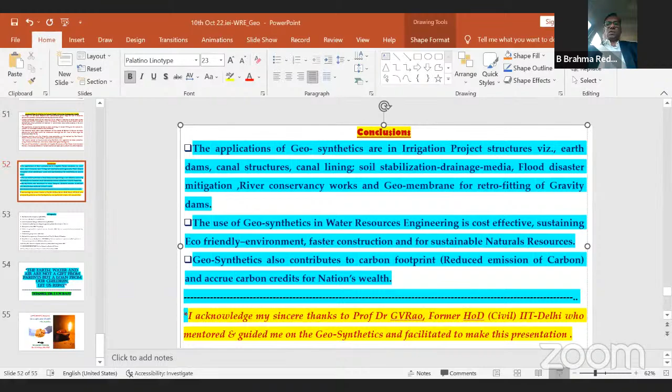Now, I request Engineer T. Venkatesham to kindly introduce the speaker. Over to Engineer T. Venkatesham Garu. Sir, Venkatesham sir is not available. I will introduce sir. Can you introduce, sir?

He was the recipient of the Best Irrigation Engineer Award in 2003 by the Government of erstwhile AP and IEI APSC, and many merit awards including Best State Level Nodal Officer of Government of AP Programs in 1996 while in service. He presented over 40 technical papers in Institution of Engineers India seminars, workshops, and other fora. He served as chairman of the AP and Telangana State Center at Hyderabad during 2014 to 16, and also National Council member of IEI during 2012 to 2016.

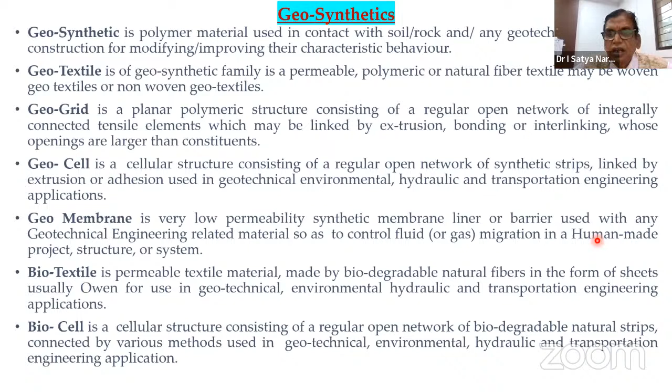Just like geotextile, there is biotextile, from the same family of geosynthetics. It is a permeable textile material made from biodegradable natural fibers. The best example is banana fiber. Banana stem fiber, with some treatment, can be drawn into sheets, and biocells also. Even coconut fiber comes under biotextile. These are some of the examples.

So now we are discussing sustainable development. Geosynthetics play a major role in sustainable development because they reduce or economize the use of existing natural resources for construction engineering, such as sand, soil, and metal. All these natural resources used in civil engineering construction are not renewable, and if we keep exhausting them, there will eventually be a shortage.

I think geosynthetics will replace some of these materials and make their use more sustainable. They improve the behavior of geological materials like soil or sand, and to some extent metal as well. Geosynthetics are developed and synthesized for specific functions or applications in construction, and there are different forms with different functions, which we will discuss in the next slide.

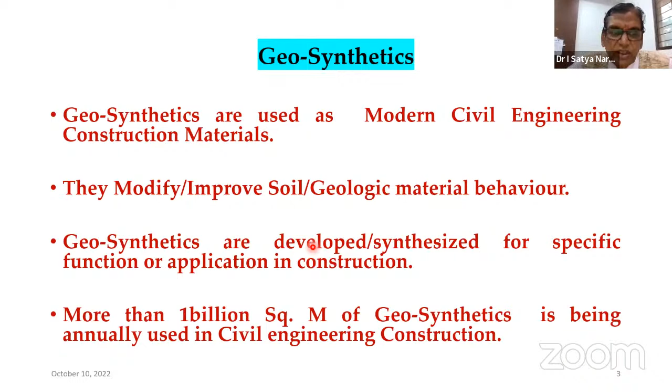As of now, I think India started using geosynthetics only recently, but globally geosynthetics have been used for the last five decades. Currently, more than 1 billion square meters of geosynthetics are used annually in civil engineering construction across the globe.

Regarding the composition and varieties, geosynthetics are composed of polypropylene, high density polyethylene film, polyester, PVC, synthetic rubber, and sometimes natural fibers like jute and coir are also used.

As I already discussed, different forms of geosynthetics include geotextiles, which are woven and non-woven, geogrids, which I will show you in figures, geomembranes, and geocomposites. A geocomposite means making a product using two or three different forms of geosynthetics combined. Geonets and geofibers are also included.

A good example of geofibers is fiber concrete, where we can use geofibers instead of iron fibers. Geomesh mattings are also there, and geopipes are used for transport of oils, liquids, and water.

Another important variety is geo bags. Geo bags can be used and are recyclable. Normally people use gunny bags and jute bags, especially for irrigation structures when there are breaches during natural disasters, but these are only effective one time and sometimes they deteriorate quickly.

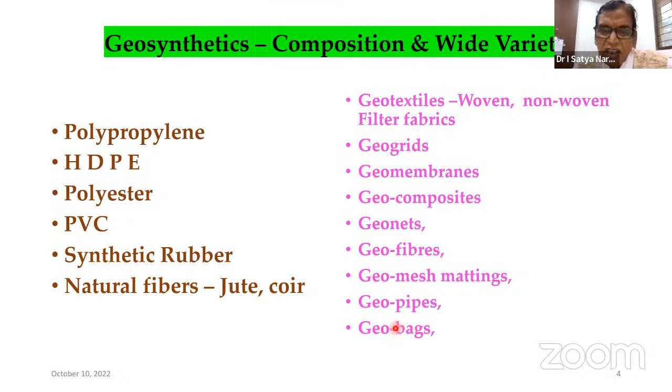Whereas geo bags can replace these jute bags, since they are recyclable. Once permanent restoration is done, these bags can be taken out and used elsewhere.

So this is woven and non-woven. Woven is, let me keep this simple and not too technical.

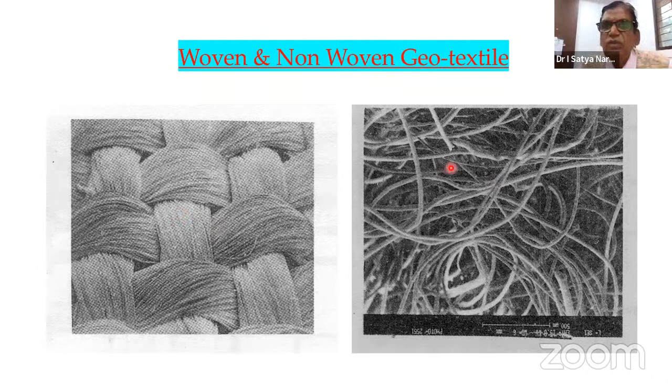This looks like that woven pattern. Whereas non-woven means there will be fibers of different lengths that can be directly used as well. That is woven and non-woven. Even textiles are woven in a similar way - that is the example here.

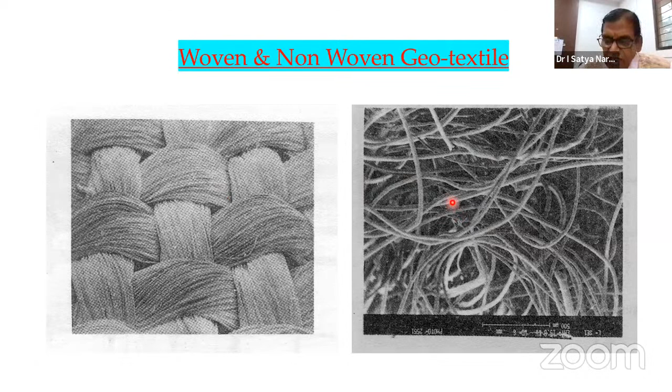In this connection, it is my privilege that Professor Dr. G. Venkata Apparao garu, former professor of IIT Delhi, helped the erstwhile state of AP and also the present states of AP and Telangana in the use of geotextiles. He was a consultant and guide, and because of his work a lot of economy in structures was achieved. He introduced and was very popular with the R&B department in road construction and bridge construction. I was introduced to him a decade back, and from then onwards I started promoting geotextiles in the irrigation department as well.

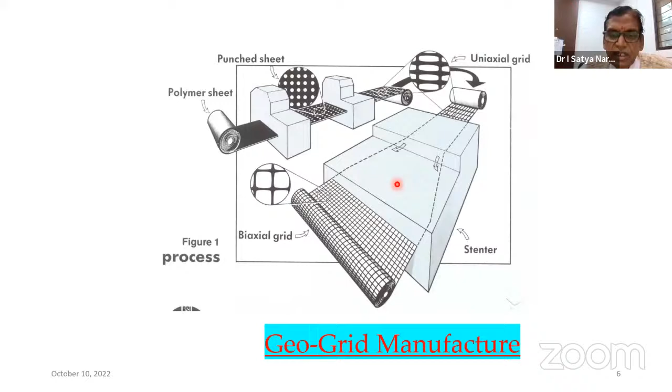So this is geogrids. As I mentioned, reinforcement can be in both directions, forming a grid like structure. Geogrids can be biaxial or uniaxial. Biaxial means it has fixed dimensions like a square, whereas uniaxial is one-sided, so it has effectiveness in only one direction.

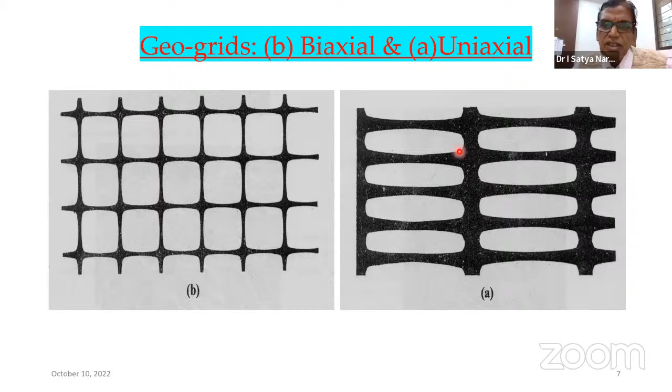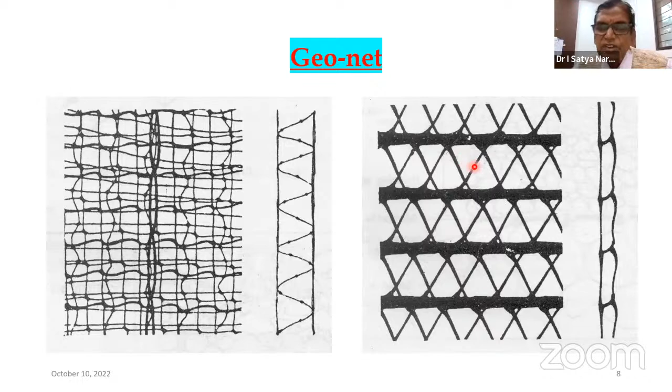We've seen fishermen's nets and other nets, even iron nets. One form of this is GeoNet. This will improve soil stabilization and foundation, and sometimes provide separation between two different materials.

These are geocomposites. Composite is nothing but a product using two to three varieties of geosynthetics. Many different products exist, and in important cases where required, we use geocomposites.

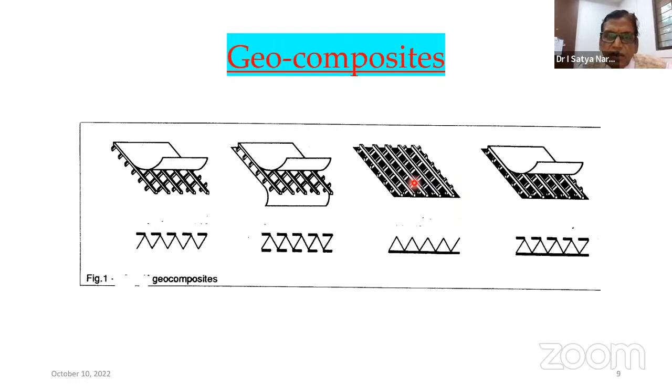Biosynthetics include coir, which is a reusable material. Presently we use it for car cushions and mattresses, but it can also be used in civil engineering as coir geotextile, though the coir must be treated against pests. This is environmentally friendly and reduces waste disposal.

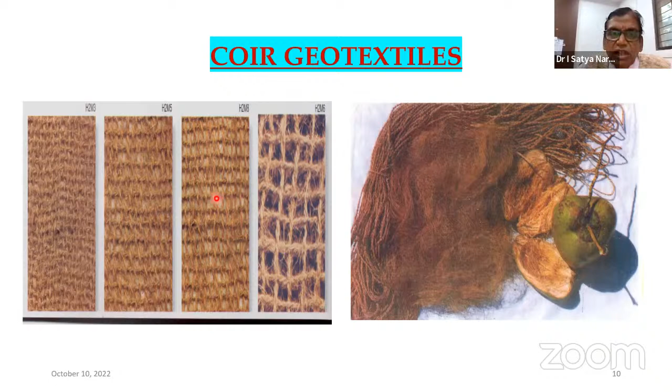Different functions of geosynthetics exist. One is separation. In roads and irrigation, we have homogeneous earth dams and composite earth dams of two different soil types—pervious and impervious. Whenever using two types of soils, we use this for separation between surfaces.

Another function is drainage media. When rain occurs, soil becomes saturated, and in saturated condition, soil loses strength. In that case, we use geosynthetics so that moisture in the soil can be drained through a proper outlet.

Filtration involves different soils. Our foundation or earth has different materials. We use this so that moisture drains off; otherwise strength won't be achieved and won't last long, and settlement will take place. So filtration media is important.

Reinforcement: just as we use steel reinforcement for a slab to give more strength, we can use geosynthetics as reinforcement to strengthen that component material.

Moisture barrier: sometimes different layers of material exist, and once saturated, moisture from one layer should not transfer to another—this is where we use it as a moisture barrier, and also as cushion. In engineering structures with black cotton soil, we replace soil with sand as a cushion to improve bearing capacity; instead, we can use geosynthetics for cushioning as well.

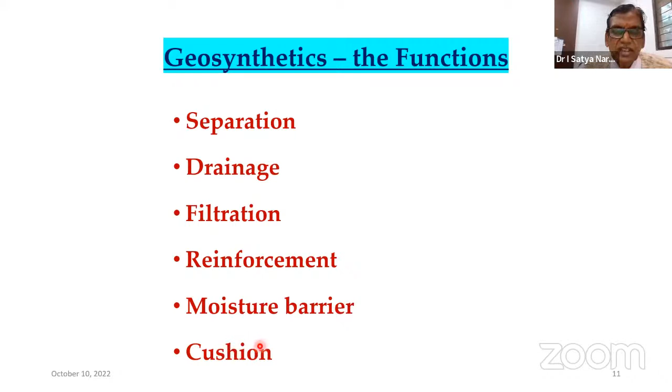This is the drainage function. By putting this geotextile, it will drain off—the pervious pores allow water to be drained out, connected to an outlet.

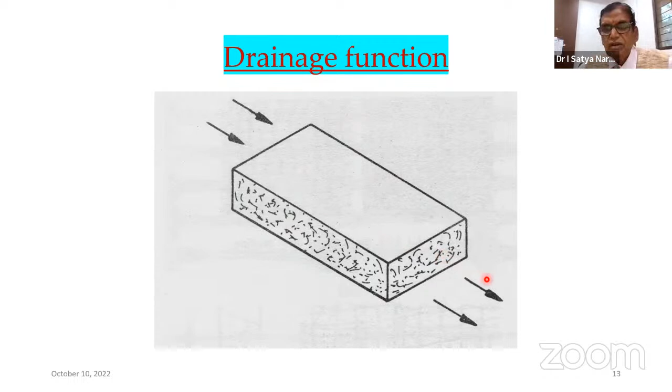Now the topic is limited to the irrigation department. Otherwise, geosynthetics have multifarious functions in roads and building departments, public health engineering, and sanitation also.

It's a filtration media. Natural soil has different types of voids, and ultimately underground drainage exists. Any moist soil, when rain comes, has surface drainage and underground drainage. When you put a geotextile here, only water passes through it. The engineering requirement is that the soil should not migrate—only water should pass without migration of the soil or material.

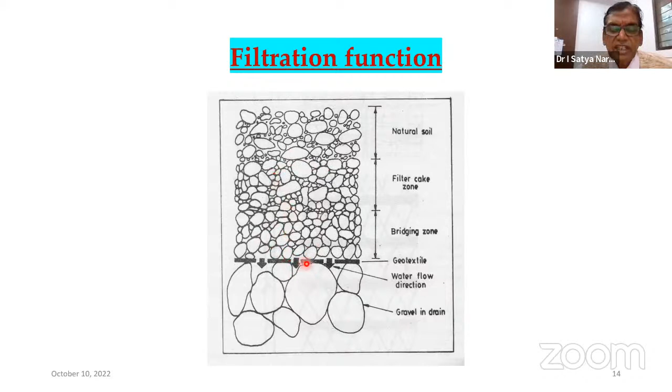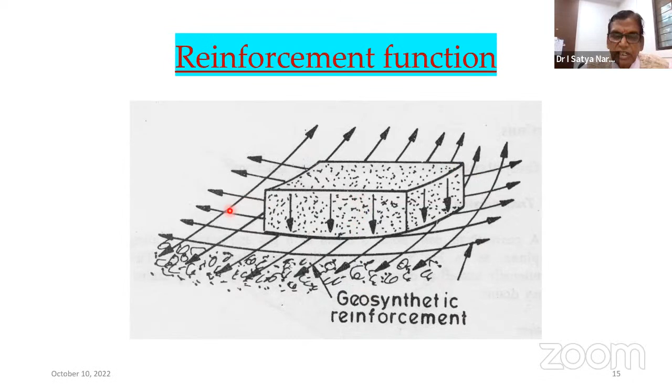So where are the applications for these? There's potable water and reserve water, and also to avoid wastage you can use the liners. Secondary containment of underground storage tanks - apart from overhead storage tanks, there will be underground storage tanks also.

Normally you are using concrete RCC walls. In place of that, you can also use geomembrane, so that the seepage losses will be reduced. Also solar ponds and agriculture industry.

Now agriculture - how will it help agriculture industry? Normally any wetting or irrigation will be done, but due to hot temperature, the moisture will slowly evaporate. So in agriculture, they lay the geomembrane to cover the topsoil, leaving just the required area for the plant.

Aquaculture industry - because aquaculture is nothing but fish ponds. So to retain the water in fish ponds also, you can use this. Golf courses, water holes and sand bunkers also - you can use it there. All types of decorative and architectural ponds also.

Water conveyance of canals - most of our irrigation department canals, if unlined, give a lot of seepage. So now we are using this to minimize that seepage. Even with a composite lined canal, below that we will place this material.

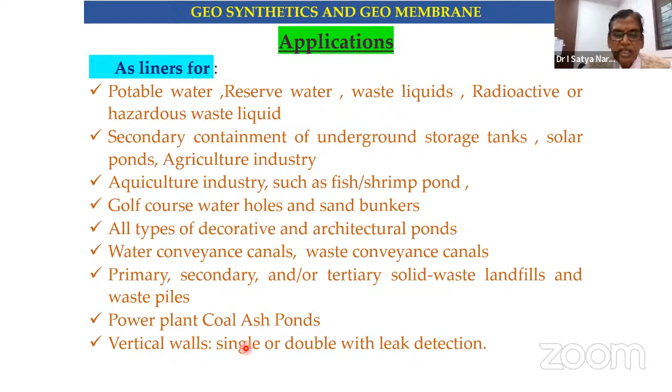In earth dams also we are using it, in cutoffs also for seepage control, and also emergency spillways. What is happening is after a passage of 30-40 years, the dam or spillway becomes vulnerable to leakage. In that case also, I will show you good examples of how retrofitting will be done using this.

Waterproofing liners - even tunnels also, you can use this as waterproofing liners. And seepage control of earth.

Coffer dams are temporary dams - you cannot invest a large quantum of money. They're temporary for 2-3 seasons to build the main dam, so there also seepage will be there. Instead of extending the dam to a greater size, by using this geotextile we can economize that also.

And barriers - I told you that landfills for solid waste management will have a foul smell. So this will act as a barrier to avoid the foul smell also, and vapors are also there.

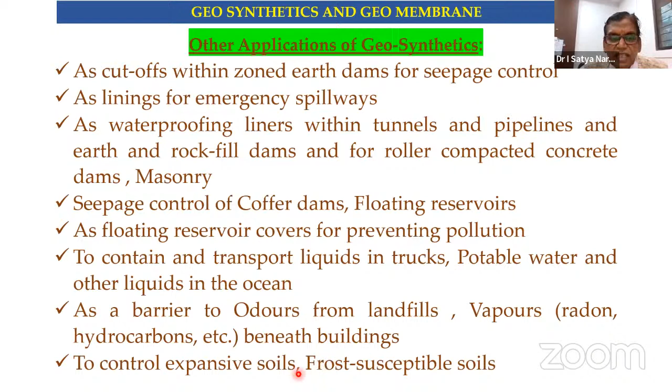And this is for expansive soils also. Some expansive soils make construction of structures very difficult because we cannot improve the strength, and the design becomes uneconomical. Then we can use this geotextile to improve the expansive soils also.

So liners for heap leach pads, like many other things mostly. Form barrier tubes as dams also - the best example is these plastic, synthetic dams. So rubber dams - we see rubber dams in Europe also. I will show you those rubber dams also, acting as rubber dams.

Instead of that, we can save a lot of soil and a lot of concrete also. For water flow pipes also, we can have geo pipes. And beneath highways, I told you that now it is a general application. In highways they are giving a lot of economy and replacement of the existing material, and the containment of structures of some temporary surcharges also. That means if the surcharge height is more, the retaining wall cost will be more, then we can contain this one also. Many applications are there.

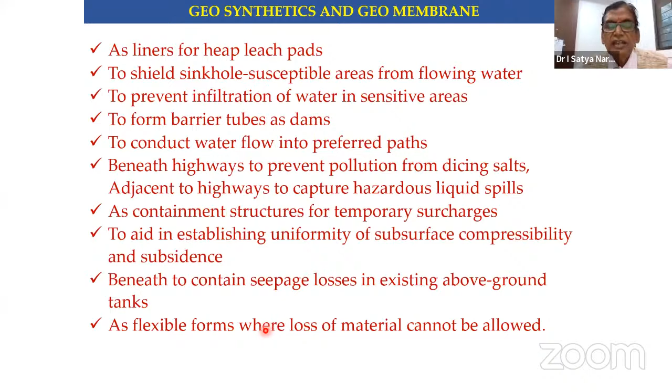In soil compressibility also it will improve. What is happening is poor soil is there. If you construct a structure, there will be permanent settlement and temporary settlement. So when you use this one, that compressibility can be reduced. Seepage losses below ground also. Like that, many applications are there. It is a flexible form where loss of material cannot be allowed, it can be recyclable, it can be used a number of times, and its life is also more. So this is one example.

Actually, river control, erosion control, and sea erosion control. I am telling you that it is a subject of the irrigation department only. So if you don't have any protection, whatever existing land will get eroded. Ultimately, the river encroachment will be there. So there, we can use this one. I will show you the different pictures also, how normally river erosion means slipping of that bund, and how it was done using this geotextile, and that land can be used for many purposes, industries, houses, or anything. But ultimately, river control and sea control will be an irrigation project, so the irrigation department will only take it up.

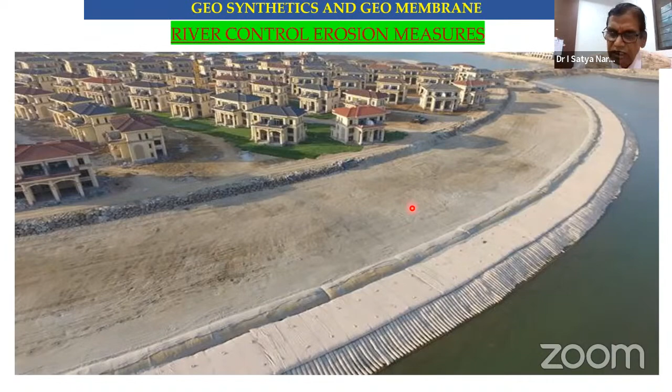So another important thing is river erosion. In Godavari, Krishna also, adjoining the rivers, there will be a lot of habitations. They erode the banks. Ultimately, it will encroach into habitation. So you can use these geotextiles. There is a common word we use, groynes. Normally rough stone groynes are used. But with rough stone groynes, in 1 year the stone will flow along with the material. So if we use these gabions, they will retain that material, and ultimately it will serve the purpose. It is a repelling groyne, so ultimately the river bank will be resettled here.

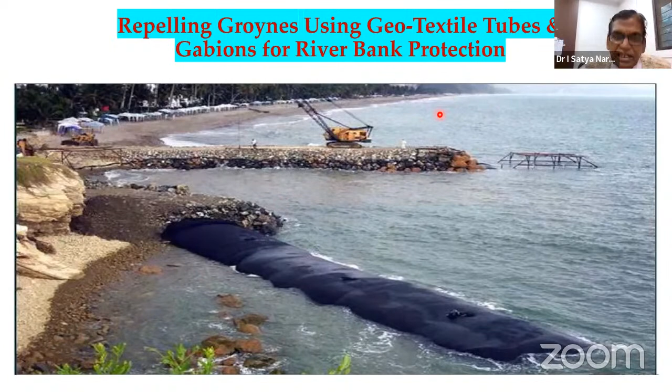Another example is geotube. Here we are using a gabion, whereas instead of this one, a geotube filled with sand can also be used as a groyne. So this is another form of this one. And the purpose of this thing is they are not permanent. After 4 years or 5 years, ultimately the river will deposit the sand, the material will get deposited, and ultimately it will arrest whatever erosion is there. So groynes normally use these rough stones.

Actually, I told you that sustainability of development is retained by economizing the natural soil. Stone and metal also are in the soil. It is not renewable. So we can minimize the use of this one by using geo bags. The inside heart is geo bags, and only the cover is stone, so that we can reduce the quantum. Sometimes in coastal areas, the quarries will be far away, about 100-200 kilometers. The cost will become very enormous. So at that time, we can use this one to economize the structure.

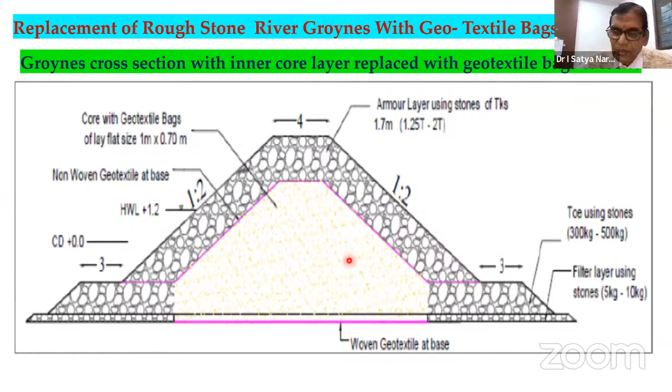This is part of irrigation structures where we can use these groynes not only for erosion, but also for minor irrigation sources, where they put a groyne across the river and divert the water through a canal system. Suppose we want to have some construction in the midst of water, you cannot. Soil will be eroded. Even sand won't retain. Even if stones are kept there, they won't retain that shape and size. So then we can use the gabion.

A gabion is nothing but a box. We can keep any size of stones in it, and they are tied with different gabions and ultimately cordon off this area. This is one form of coffer dam, I can tell you that. Suppose you want to have any construction, we'll form it like this one.

So the liner, actually, you see this membrane is there. That is leak proof. So by putting this one here, whatever quantum of water will be there can be retained for a long time. Otherwise, if this is not there, in 1 or 2 days itself, the seepage will be much more.

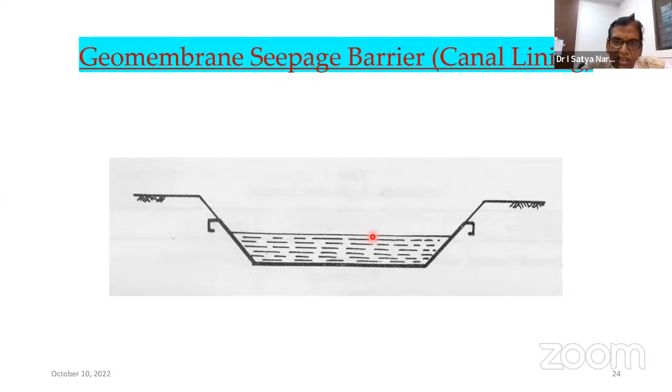So I told you that in canal lining also we are using this geomembrane. You can see this geomembrane fiber. So it will reduce the seepage losses and also transportation losses. This is one of the applications. In our Nagarjuna Sagar project also, the World Bank project, we have used this one. I will show you that figure also.

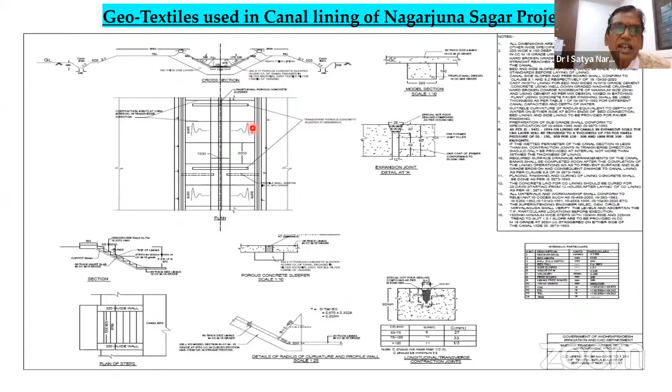This drawing was issued by our chief engineer. When I was the chief engineer, Central Design Organization, this drawing was issued. This is the lining here. Below that, we will use this one so that seepage can get reduced, the loss will get reduced, and it will be sustainable also. It is a composite application. Along with CC lining, we are using this one.

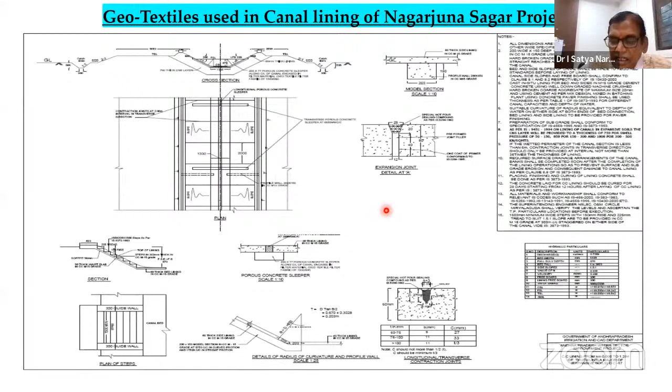But everywhere you cannot use RCC lining. So in that place, we will only have this geomembrane. And a lot of specifications were there. Some of our friends attending this know about this one. I told you that these geosynthetics have been in use for about 5 decades. In Europe and other countries, they are doing it. Actually, they are giving the technical knowledge to us.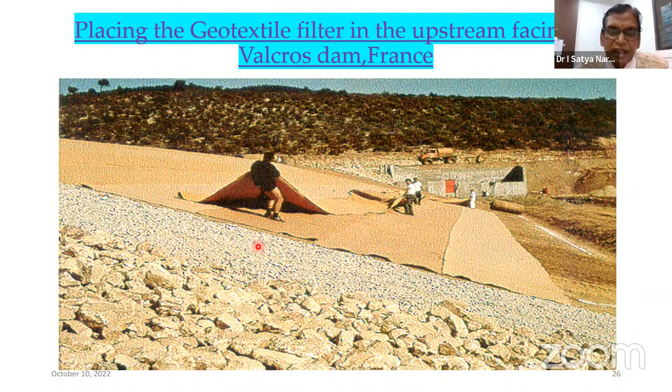Yesterday also in one of the WhatsApp groups, people said that the lining of Nagarjuna Sagar left canal is getting settled, because the drainage is not proper. So if you have effective drainage, we can use this one also. So this is the Valcros dam in France. So actually the dam is here.

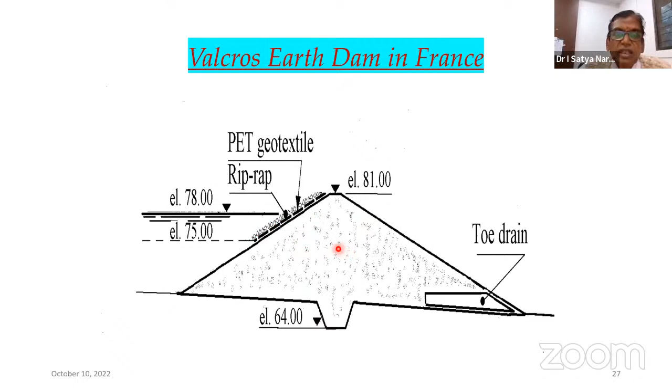So we are putting a geotextile membrane. Over that we are putting riprap, so that any water, whether it is river water or rainwater, there will be a mechanism of drainage without disturbing the body of this wall, without any erosions or dips or anything else.

So this is another concrete dam, Lago Nero Dam in Italy. After some time, these concrete dams will be prone to leakages. I think this dam might have an age of 50 years. So this dam was leaking. Then the project used this geomembrane, geotextile, pasted on the face of this one, and the seepage was stopped.

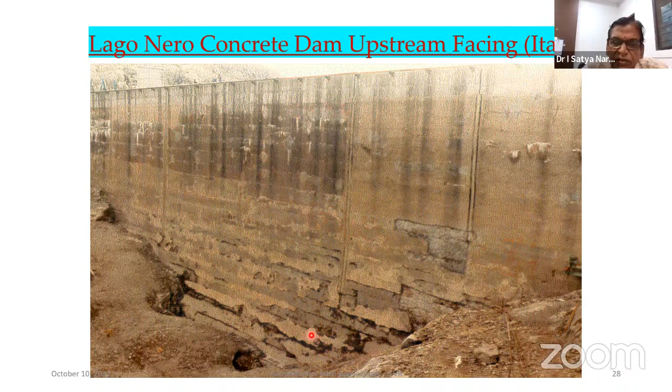And in India also we did one project. I will also exhibit that one. So this is a dam structure; on the front face, this PVC geomembrane and geotextile were placed. Of course, it's not that easy. We have to fix it with heating and all those things. Once this is done, automatically there will be no seepage.

Any dam is supposed to retain the reservoir capacity. If some seepage is there, it will not serve the purpose of irrigation or hydropower or anything else. So the retention of water storage is important. New dams will fulfill their requirement, but old dams will have seepage, due to wear and tear and other reasons.

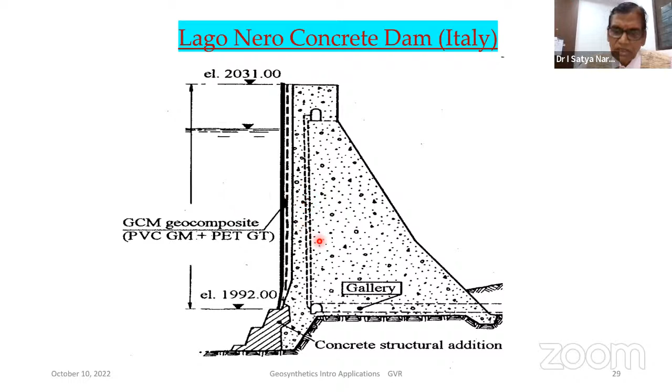So this is ultimately the dam you have seen. It was fixed with this geotextile or geomembrane, geosynthetics. You can see that it was pasted here. Beneath also, it will protrude into the keying. Ultimately, by doing this, the dam is retaining its own capacity. This is retrofitting.

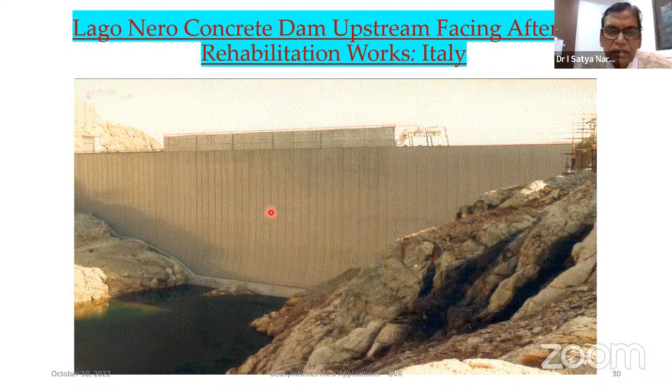So generally what engineers do when a dam is not serving its purpose is go for a new dam. A new dam's capital cost will be very high. So if you have this retrofitting, that will be economical, and the life of the dam will also be increased.

Kadamparai Dam is one dam in Tamil Nadu. It is actually a hydropower dam, a pumped storage dam with a capacity of 400 megawatts. Its storage is 26.85 million cubic meters. Actually, when I was CEDO, I also visited this dam to replicate the same in some of our dams.

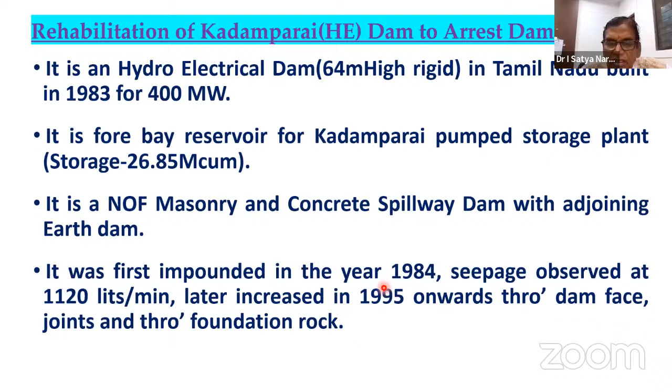It was completed in 1984, but seepage was observed at the first impounding itself, 1120 liters per minute in the surface area. Later it was increased in 1995. So ultimately the dam was not retaining any water. So then the retrofitting was taken up and it was done.

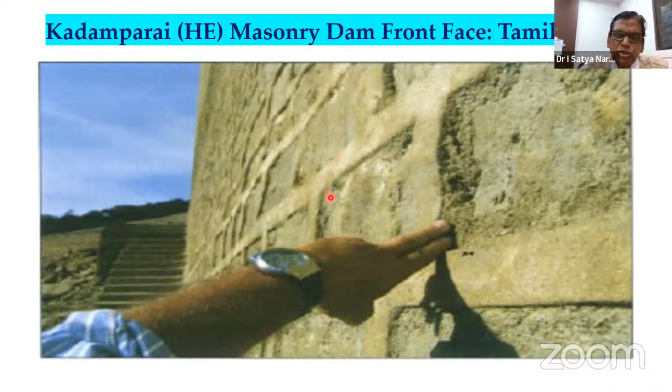So this is actually what you can see. This is a masonry dam. The joints will be there, and water is getting leaked through them. So ultimately, the dam is not serving its purpose. Though it was commissioned in '84, it was not repaired until 2005. So the capital investment in the dam has gone to waste. So ultimately, it was retrofitted using this one.

Its retrofitting was done by a waterproofing liner. I told you about one of the Italy dams where they fixed a PVC membrane. Similarly here also a 2.5 mm thick membrane was fixed by heating, with the non-woven variety, and it was also fixed by nailing. At such a height of 40-50 meters, if you simply use adhesive to fix it, it will peel off. Ultimately, it was fixed with steel rims and steel battens.

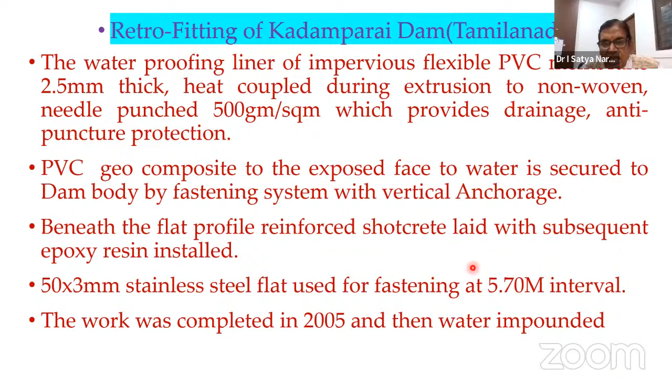This is the mechanism. A PVC geocomposite was used here and anchored to the dam surface. Flat steel profiles were also fixed at intervals of 5.70 meters, so that the fixing of the geomembrane will remain intact. Ultimately, the work was completed in 2005. So this is how it was fixed here in Tamil Nadu itself. In our country, this is the first of its kind.

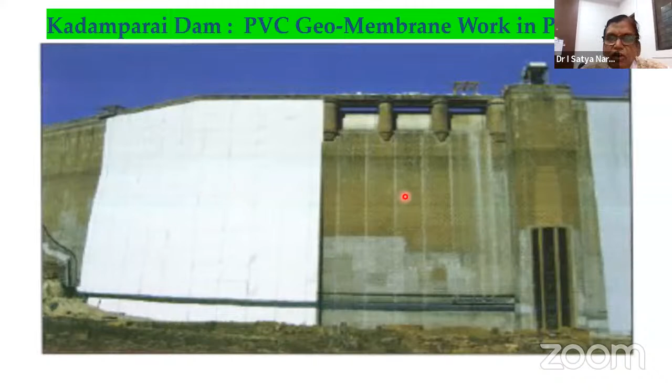I will tell you, this is a spillway regulator. This is a masonry dam on either side. The masonry dam is covered with concrete. Sometimes a masonry dam will have only pointing. So this is the dam. This is a portion of non-overflow dam. This overflow dam is nothing but our spillway regulator. You can see that this entire thing is fixed with geosynthetics in Tamil Nadu. Ultimately, it has become proof, with limited seepage only.

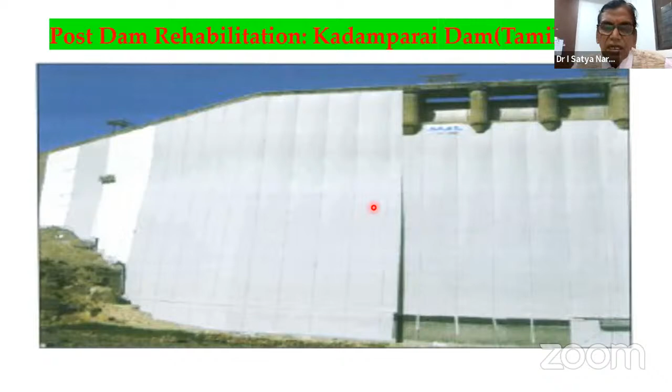I will discuss the cost aspects also. So the work was completed on this Kadamparai hydroelectric dam in Tamil Nadu. This is a hydropower dam. Initially after completion of retrofitting, they predicted 1400 liters per minute, against the pre-repair status of 28,000 liters per minute. Ultimately, when it was measured, it was only 63 liters.

That is much lower. The cost of this repair was 12.48 crores. The surface area is 12,700, which means it costs about 10,000 per square meter. They have given a warranty of 10 years also. So now the dam is functioning again, and since it is a hydropower dam, they recovered their investment within 5 years. The economic rate of return was in 5 years.

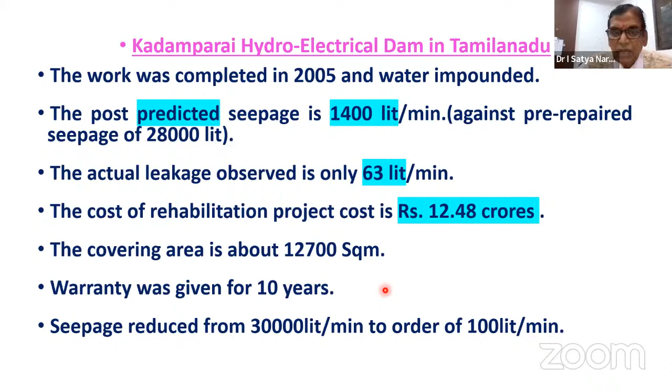So this is one way of retrofitting using geosynthetics. Now it is less than 100 liters per minute, which is permissible in any dam as per the IS code or Central Water Commission. Other applications are in earth and rockfill dams, which also use it for water tightness.

And I told you that we use the homogeneous section, and also composite sections will be there. In a composite section, different soils are used, that is, permeable and impermeable soils. We can use a geomembrane there, and it also provides a drainage medium without soil migration. Actually, we will use sand filters also. Beneath the sand filters, they put this geomembrane so that the drainage seepage is reliable.

Earth dams are not rigid dams, they are flexible dams. Some seepage is allowed, but some dams seep more quantity than what is designed. At that time, you can use this. It gives superior performance and is cost effective.

Sometimes old dams also need to be raised. For a concrete dam, you will simply raise it, but raising an earth dam is not that easy. For example, our Nizam Sagar. It was silted up with a lot of siltation, capacity was reduced, then they raised it. At that time, of course, they did not use geosynthetics, but you can use geosynthetics at lesser cost. I will show you some figures of how we can raise an existing dam, and also a new dam.

Sometimes the FRL and MWL also, because floods will come and more inflows will come, we have to modify the standards. For that modification of standards, we cannot replace it with a new dam at higher cost; we can modify at lesser cost using this. Also, for seepage control in earth dams, you can use geomembranes. Geosynthetics are further used to prevent soil migration. For the stability of an earth dam, we can allow seepage, but if soil flows along with water, ultimately it will turn into piping and the dam will breach. So it will arrest that soil migration. So I can show you.

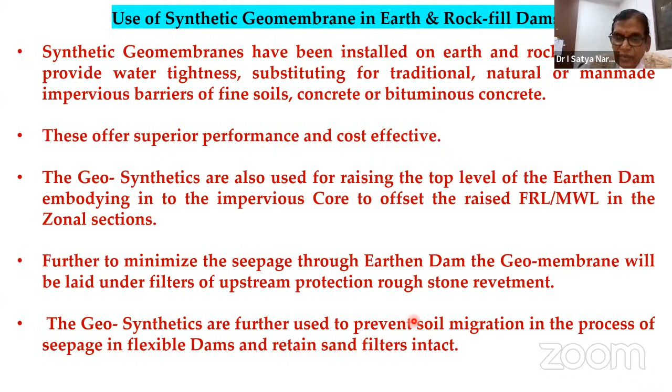In our earth dams, in irrigation dams, we will have a clay blanket in the reservoir itself of 10 times the height. That clay blanket doesn't last long. We can use this one; it will have 30-40 years capacity. It will reduce seepage. So we can have this face cover, and we can use geomembrane. For the face work, it is fixed with the toe wall, and also it is keyed into the heart of the dam.

Gabions, I told you, gabion technology is nothing but a replacement of our concrete wall or masonry wall. Normally for a masonry dam, we have to put cement mortar between the stones. There are also dry walls. If you put stones one over the other without any mortar, they will simply disintegrate and fall on their own. In that case, we use this gabion box, fill the boxes with stones, and different boxes can be tied to each other. What I showed you in the middle of the water, that gabion wall, is a replacement of a concrete wall.

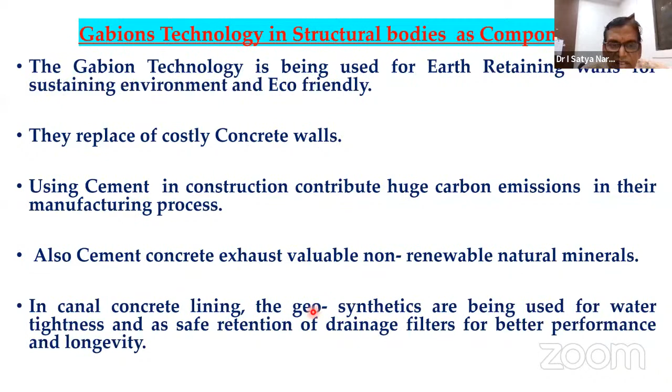In concrete lining also we are using geosynthetics, and in such different structures also we are using it. So you can see this one. This is also one sea erosion site. You can see some ships are also going there.

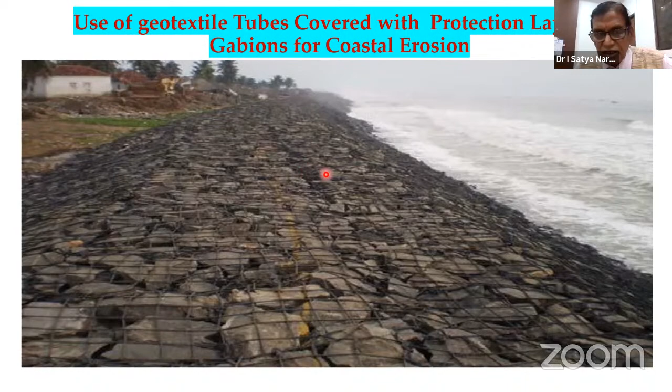So there we are using these gabions of different shapes. It may not be a box; it can be a net. Below that, stone is there, so even though sea waves are hitting it, that soil will not be eroded. So this is one gabion application, coastal protection. That coastal protection against sea erosion will mostly be done by the irrigation department.

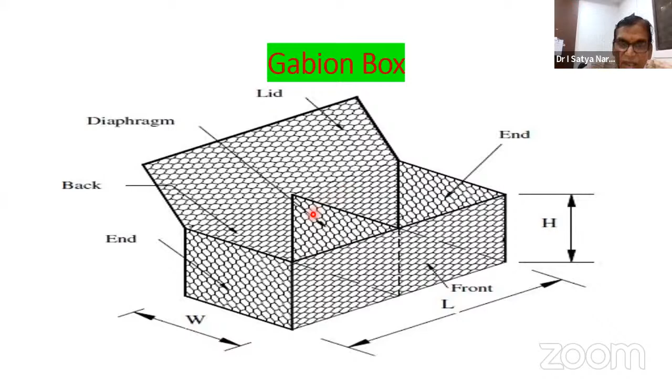So this is one river bank erosion case. They have used these gabion boxes one over the other. The design will be there; you simply cannot do it without a design: what is the box size and what type of stones will be there. You are also using geotextile to avoid seepage. And in place of the RCC wall, stepped walls will be there. It is a stepped gabion.

So behind this box we'll use whatever soil is available there. We will place a membrane to avoid seepage, and if seepage is there, without soil migration. This was mostly done in the northern Brahmaputra river and other rivers, because it is very costly and every time flash floods will be there. This is an alternative to the failure of river protection.

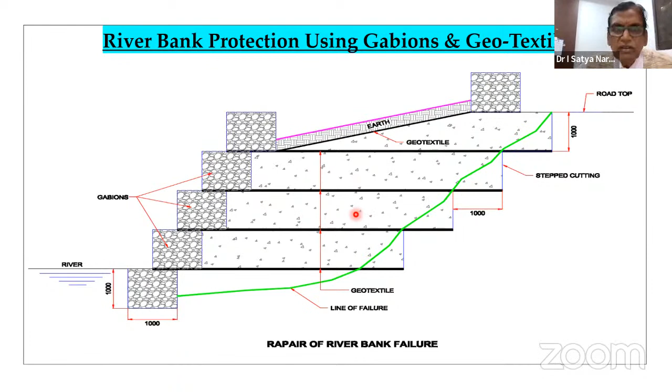So this is for retaining walls also. Normally a 10 meter retaining wall is there. If you want to construct a wall, an RCC wall is very costly. This now is also replaced by a terra mesh. So these are the terra mesh and gabions. Behind this, the local soil available will be used, and a key trench will also be there.

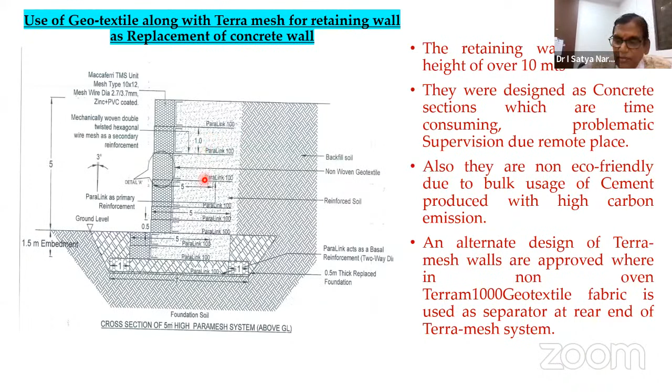We have actually constructed this in Kurnool and other areas instead of a wall. I myself have seen and approved this wall, and I think we have saved a lot of cement, concrete, and also carbon footprint. So this is also possible. So these are the gabions; minute details are given here.

So the design will depend on the foundation soil characteristics, c and phi values, and also the unit weight. We'll design it. Ultimately, box and terra mesh will be there. The details of terra mesh 1000 geotextile, that is the specification. The BIS has also now published codes on how to use these.

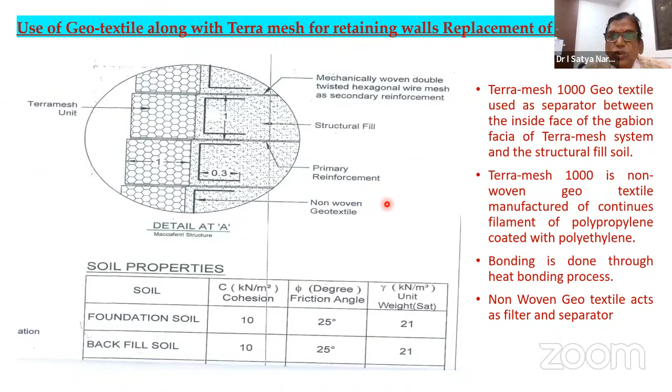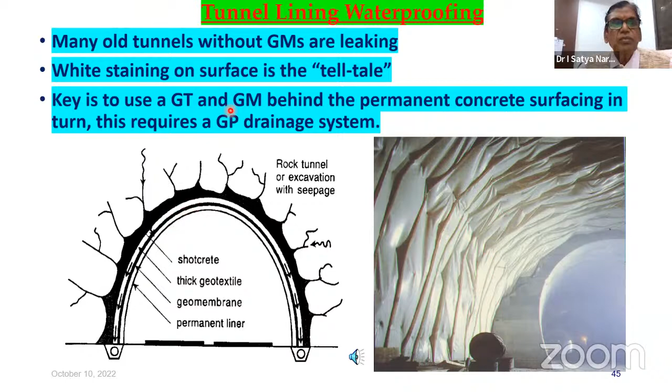Normally many old tunnels without geomembranes are leaking. From a safety point of view also this is required. Normally tunnels will fail because of heavy seepage and also because proper nailing is not done. So geosynthetics will make a part of the nailing also. You can see this one.

So flood mitigation. Now it is very important: we cannot contain the floods, we cannot contain the heavy rains. Normally during flood time earth bunds will breach, canal bunds will breach, and some of the gates will get washed off. Even earth dams and side slopes will slip, and the protecting rough stone will also cave in, and slips will be there.

On the downstream side of our spillway regulator, for example Srisailam, there are also cavities that form. Normally these features occur during floods. Conventionally we do a lot of things with gunny bags and other materials. I will discuss alternatives to this in the next slide, how geotextiles can be an alternative to the regular approach.

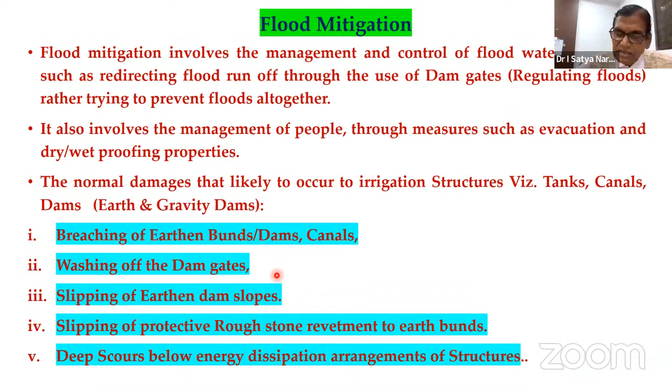For normal floods we use gunny bags. That is time-tested and locally available, so we use them, though even now there is a shortage of gunny bags. When we want to close a breach, if you put soil it will get diluted and wash away with the water. So normally you use gunny bags with sand in them. But that is a one-time use, and sometimes even that is just temporary restoration, not permanent. In that situation, sometimes even the gunny bags get damaged.

So in place of that, you can use geo bags that are recyclable. Normally the gunny bags provide temporary protection, and after that permanent protection is built. So after permanent protection, all that investment goes to waste. If you use the geo bag, it can be removed after permanent protection and used elsewhere.

Also with stones, if there's a cavity, we dump rough stone, but measuring that rough stone is a problem. Some of our engineers have landed in vigilance cases because the quantity recorded is not visible, with allegations of inflated quantities. Whereas if you use gabions, the sizes are fixed, and they are almost a permanent measure. We can see it, and the department can also execute it directly.

Also when there is slipping of soil, as I told you earth dam slipping occurs, you can use geo bags to protect that, instead of the normal gunny bags used for temporary protection. We can use geo bags and gabion mesh for this. Even stone dumping that we do in flood disasters, instead of simple stone dumping, we can use gabions, so that it is more effective with less loss and wastage.

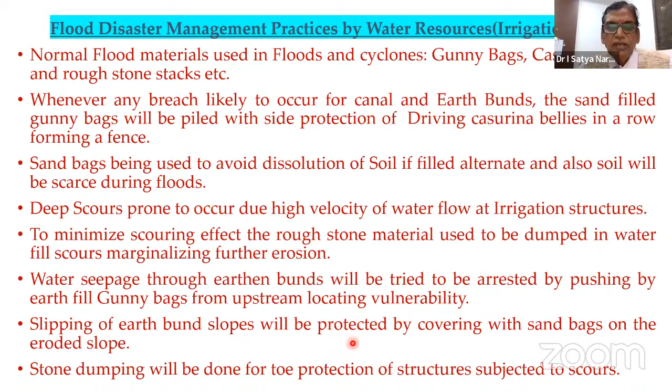So these, as I told you, are all geo bags. You can see they get filled and kept here. Instead of a gunny bag, these bags can be used for flood disasters. They retain and stand for a long time, the life of this bag is about 25-30 years. Earlier I told you soil will not retain in gunny bags, but in these bags you can use soil even if sand is not available.

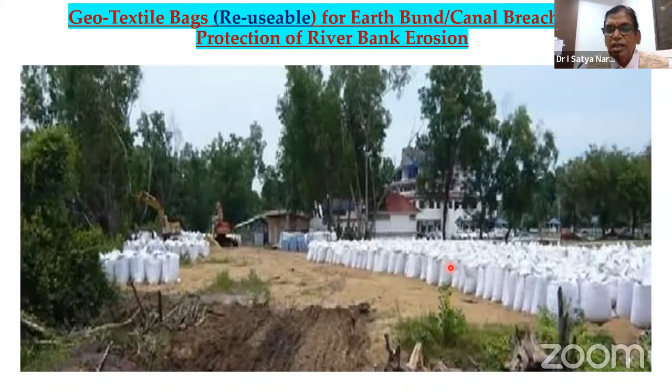Nowadays sand has become very costly, a scarce material. So you can use locally available soil in these bags and put it here. Once permanent restoration is done, these bags can be taken and used elsewhere, or they can remain as permanent protection.

These are some of the protections using geo bags. You can see this layer of bags, they are basically a replacement for rough stone. As I told you, rough stone quarries are not available everywhere we need them, so we have to bring them from far. For example, in West Godavari, quarries are available in East Godavari at Dowleswaram, so to do work in Bhimavaram they have to bring stone nearly 100 kilometers, which is very costly. In that situation, we can use geo bags instead.

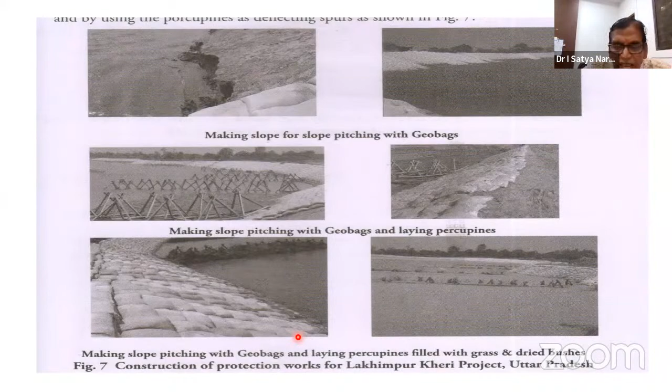These are examples where I told you even stone pitching sometimes gets disturbed, even for earthworks. If you use gabions and mesh, it will retain for a long time. Normally, otherwise, you have to maintain it every year.

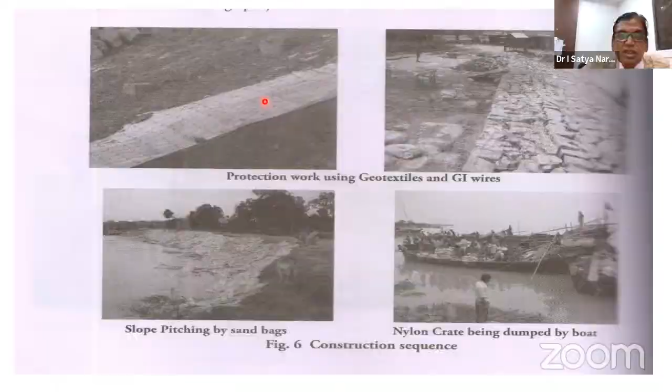You can also see, in Brahmaputra or other places, material was taken from there. So this revetment was used along with geo bags spread here for river protection, as I told you. In disaster management, instead of gunny bags, you can use geo bags, and we can also use gabions.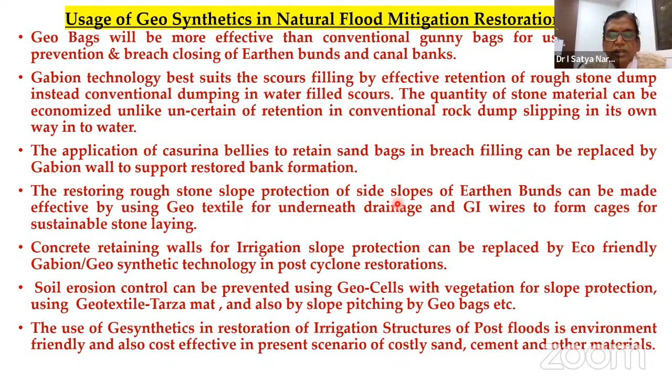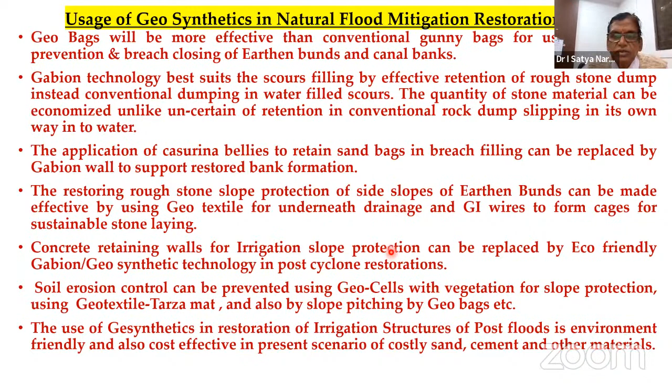Also, if permanent structures such as dams collapse, instead of dumping stone, you can use gabions there, with proper measurement and proper recording. Sometimes, as I told you, spillway regulators also get eroded during heavy floods, and there too you can use this.

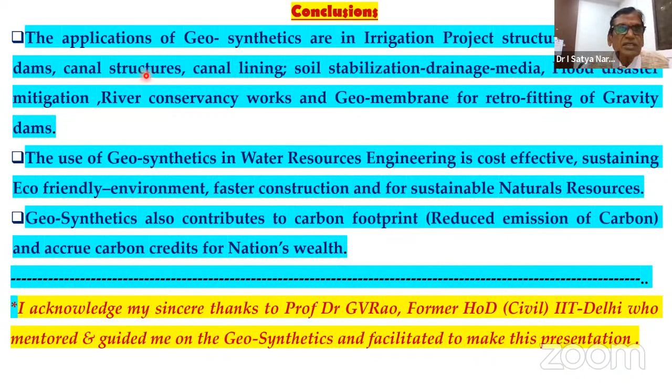So ultimately, the conclusion is that geosynthetics can be applied in irrigation projects: in earth dams, canal structures, canal lining, and soil stabilization. Soil stabilization is useful not only in irrigation but also in roads and buildings, and in rural water supply schemes and sanitation as a drainage media. Flood disaster mitigation, as I explained with geo bags, and river conservancy works also apply, since rivers are often roaring and cause erosion and caving in, where this can be used too.

Geo membrane is used for retrofitting of gravity dams. As I told you, not only earth dams but concrete dams can also be protected. I showed you two examples, Petli Dam and Kadamparai Dam, where there was leakage, and we fixed the geomembrane to the face of it. Of course, it's not that simple, a lot of technology goes into it.

So the use of geosynthetics in irrigation projects is cost effective. As I told you, it helps sustain materials, since soil, sand and metal are not renewable resources. We can economize, though we cannot avoid using them completely, by using geotextiles for economic design.

They are eco-friendly. When using cement walls and RCC walls, cement production causes a lot of carbon emissions, and even during construction there are emissions and pollution. If you use geotextiles instead, carbon footprints can be saved, contributing to sustainable use of natural resources. The world is now counting carbon emissions in terms of climate change and carbon footprint, and reducing emissions. So we can showcase this and claim carbon footprint credits, registering how much carbon footprint is saved by using this. Ultimately, these credits contribute to the nation's wealth and sustainable development.